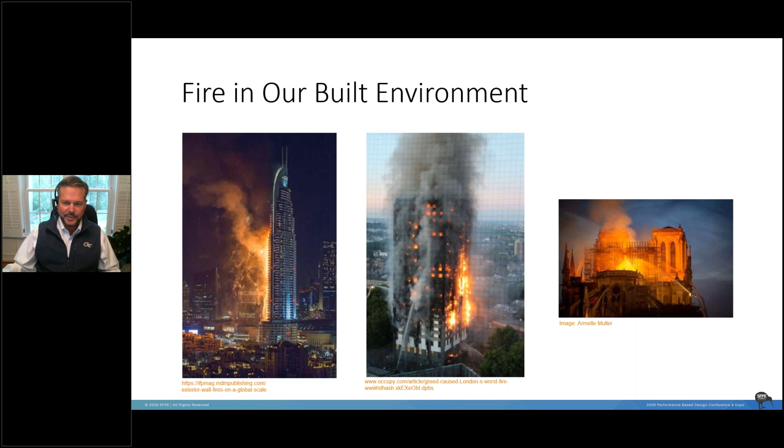So obviously fire in our built environment has been in the news for several years now. In fact, depending on how far back you want to go, several decades. The fires in the UAE probably garnered the most attention, even though we had loss of property there, not necessarily casualties and loss of life on the scale of Grenfell Tower. Grenfell Tower, of course, because of the loss of life, has generated a lot more serious discussion about what we need to do in terms of education, regulatory reform, and how we deliver buildings in our built environment. And of course, Notre Dame, which is a whole different topic, but certainly introduces the idea of landmark buildings and structures and the impact that some of these issues can have on those properties.

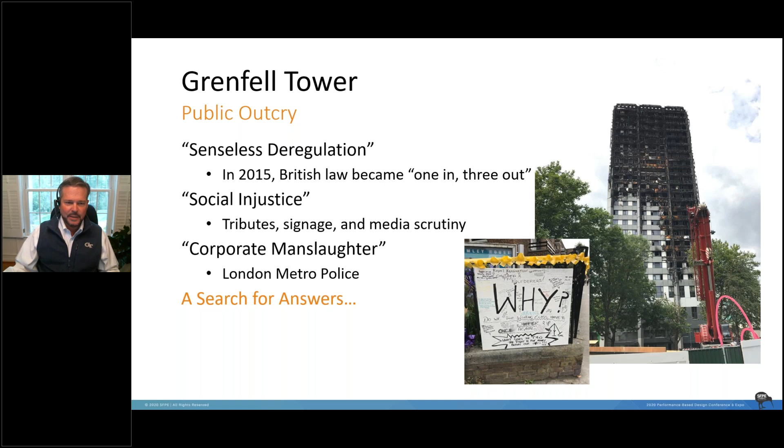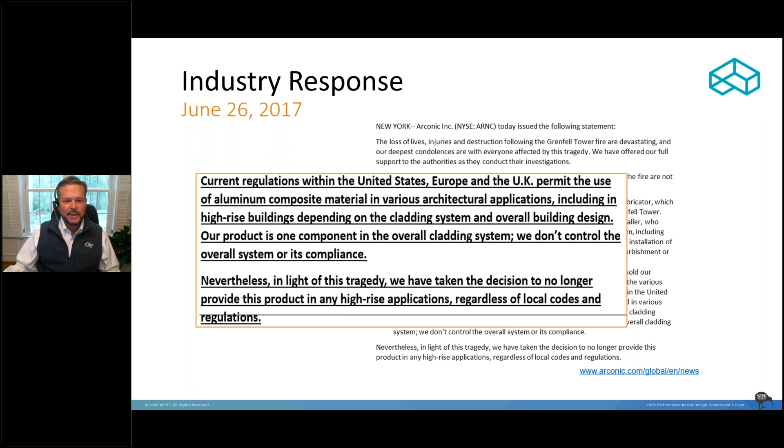The industry response, very quickly, this was the manufacturer of the exterior cladding panels at Grenfell Tower. The response, not surprising, from the manufacturer in terms of pulling product back a little bit, taking a deep breath, trying to understand what happened at Grenfell Tower. And again, how can we make changes to address that? And what can the industry do? A lot of our material science expertise resides in the industry. So there's a keen interest in the industry to help respond to this.

Regulatory response, and Neil will talk in more detail about this. This was some of the initial response. We had an immediate effort by the BRE in the UK to take coupons or small samples of some of the cladding panels and determine the combustibility of those materials. Of course, the focus went quickly to ACM panels with polyethylene cores as fuel for this type of fire. They convened an expert panel.

Everyone took a step back and realized that it's not just the exterior cladding, it's the insulation, it's the design of a rain screen cladding system itself and how it contributes to propagation of fire inside that exterior wall. So you had an immediate response because of the public outcry, a step back with experts to try and understand this in more detail, and then right back out with a variety of different efforts to try and solve the problem.

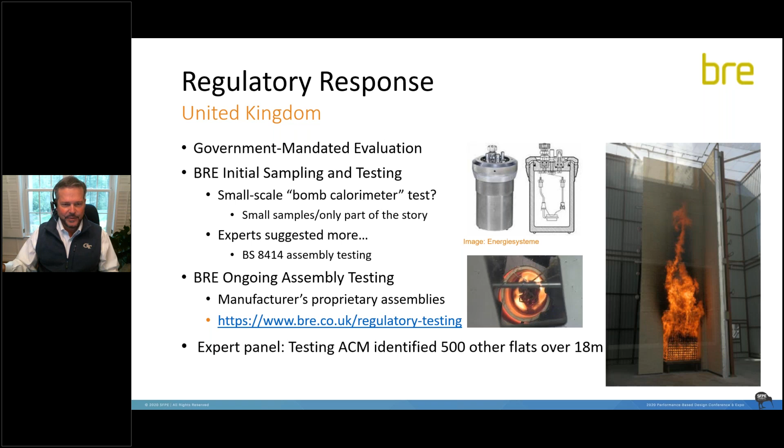We have this website link, and some of you have probably been there already. The BRE undertook to publish different systems and materials that have been tested in full-scale assembly tests to try and educate the population about where this was and what action they were taking in response to Grenfell Tower.

When we look at how buildings actually perform, whether we're talking about heat, air, moisture transfer, microbial growth, or in this instance, fire, combustibility of products and materials and propagation of fire, are we doing enough at the university level to educate? And more importantly, after folks are in practice, what are we doing to make sure that the individuals involved in project delivery have enough knowledge and expertise to really make a difference in this?

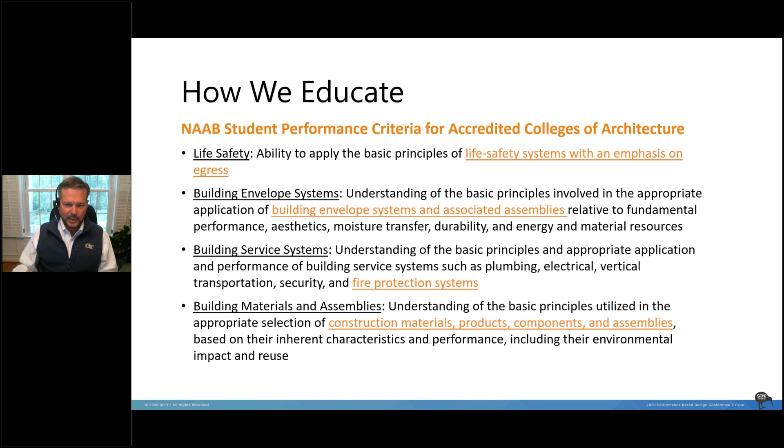These are some of the areas that we're pursuing on parallel tracks with universities to try and help them understand where this curricula should go to help address some of these issues. And again, are we doing enough? When we look at the US and to some degree the UK, at project delivery, design, and construction, we understand that there is a bit of a failure to educate on building physics at the graduate and postgraduate level here in the US.

As I mentioned a moment ago, the topics are there, but the emphasis that different universities place on those topics will vary widely. So what can we do to bring that into alignment and make sure that we're delivering a consistent level of education on these issues? And then first principles in sustainable design, understanding, particularly with material selection, that it's really more than climate specific, renewable resource driven selection of materials. We really have to understand how materials are going to behave in all different circumstances beyond climate.

Compartmentalization of the design profession, this is a bit of the diagram we have here. When you think about property loss, when you think about litigation, the consequences of litigation and property loss, the architect of record is always in the middle of that. We've seen some litigation here in the States where suddenly the sustainability consultant is being held to a higher standard because they've weighed in and made recommendations to the architect of record on insulation products, cladding materials, that type of thing. If they're not fully understood and vetted by the architect, or they're just accepted, you can introduce problems onto

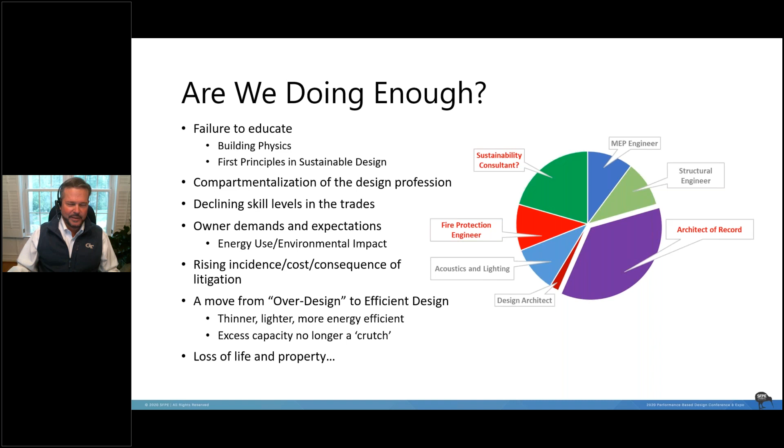When you think about what Neil will talk about here in a couple of minutes on the regulatory side, this is a similar response from the UK. We have what they're referring to as the golden thread. And again, the emphasis here is competence and accountability. How can we make sure that the right people are at the table at the right time in the process to make smart decisions about where the design is headed, where the construction is headed,

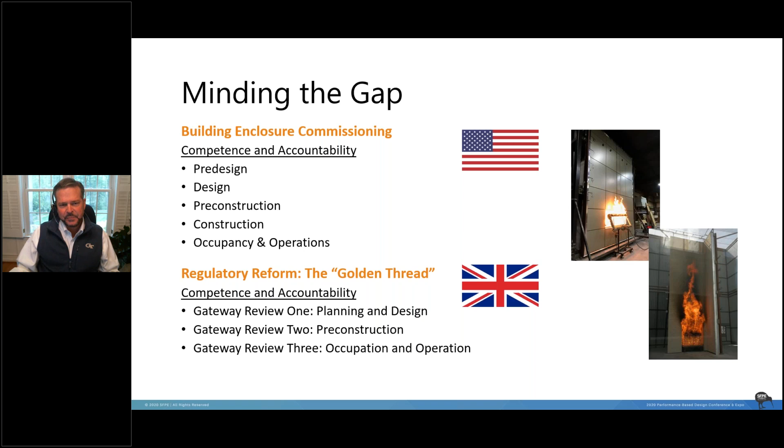and more importantly, from the perspective of the UK and where Neil will focus, when we introduce a layer of government to help understand and address some of these issues, how do we educate that layer? You know, that's the important piece. When we have people responsible for monitoring this process, we need to create on a parallel track a way to educate that group. And that's precisely what this is.

This is the challenge. When we want to create this layer in the context of regulatory reform on a parallel track, we really have to think about education at the university level, training programs, education and training after you're in the practice. We have many, many practicing design professionals, real estate professionals who need some access to this type of education to address some of these issues.

So how do we do that? Do we engage universities? Do we engage standards development organizations? How can we create this framework where people can get the education they need to properly administer this process. And so with that, I will hand it off to Neil, who's going to go into a little bit more detail about regulatory reform in the UK and where we are today.

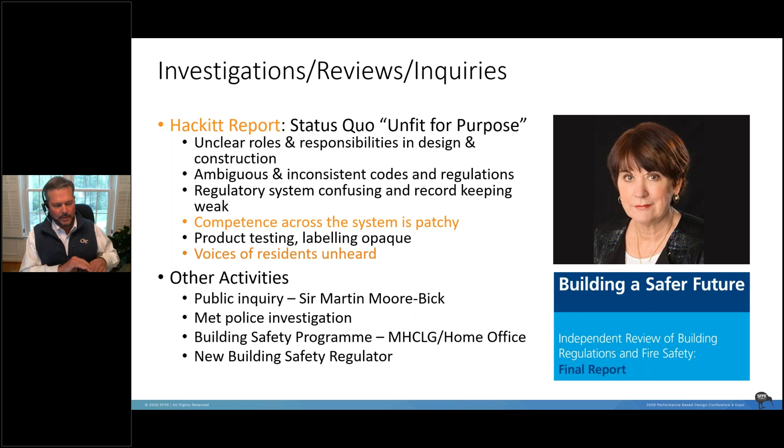Neil? Yeah, thank you, Dan. Lots of interesting questions posed there, and I hopefully got people thinking already. I want to take you on a short journey, setting out some of the background about what we've discovered that's failed in our system since Grenfell, and then focus heavily on the proposals to perhaps put our house in order regarding competence.

But you will be seeing on your screens now a picture of Dame Judith Hackitt, ex-leader of our Health and Safety Executive, brought in by the government to review the whole system, to look at building regulations and fire safety. And we'd sort of got to that opinion ourselves already, that what we had was not fit for purpose.

We were all shocked to the core that we could have tall buildings covered in this material and such a lack of compliance with the building regulations. But Dame Judith dug in and identified some of the underpinning problems: the unclear roles and responsibilities, ambiguous and inconsistent code. She suggested a regulatory system that was confusing, competence across the system is patchy, voice of residents unheard.

The government didn't just bring in Dame Judith to look at the failures in the building regulations side of things. Sir Martin Moore-Bick is running a public inquiry. I'll mention the first stage of that. The Metropolitan Police in London are looking at the potential for charges for manslaughter and the criminal side of things. The government departments, two of them, the Ministry of Housing, Communities and Local Government, alongside the Home Office, who between them have responsibility for fire safety standards and fire law enforcement, set up a building safety programme.

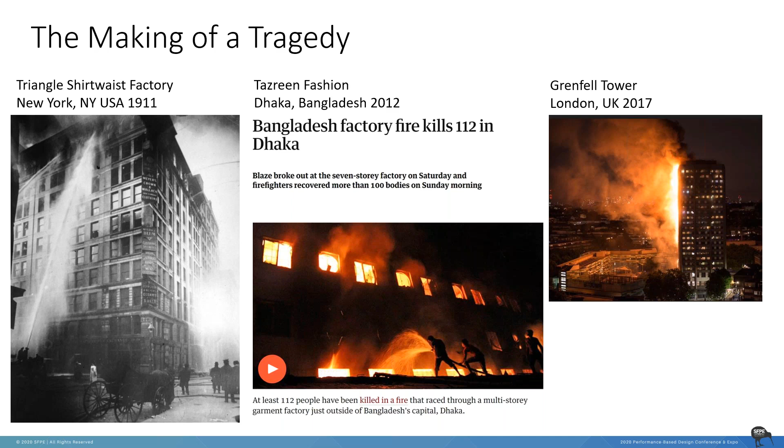Next slide, please. Martin Moore-Bick listened to everyone that was called, over 500 respondents, and came to a conclusion at the end of his first phase of the inquiry that Grenfell Tower's exterior facade did not comply with building regulations. He also had some strong words to say about London Fire Brigade and their stay put advice to the residents on the night, and suggested that things could have turned out differently. But my focus since the fire has been about competence, and how did we end up with this system where no one in the system is required to be competent. Next slide, please.

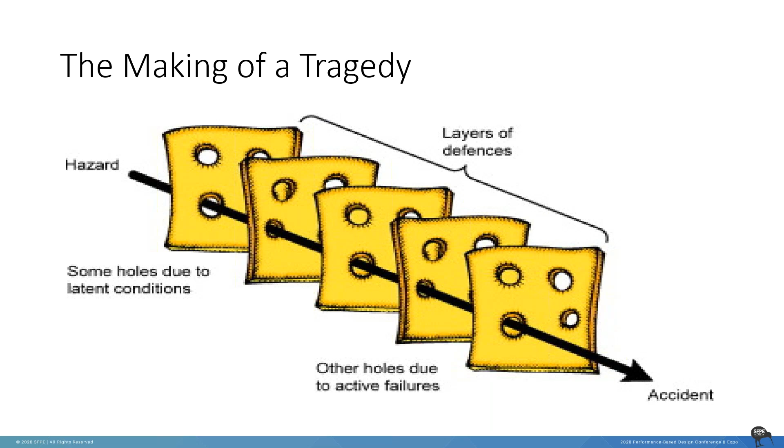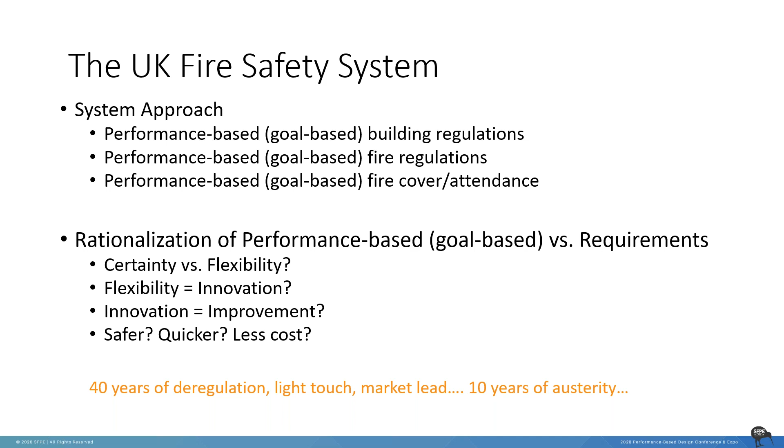So, whilst some of this has been replaced by announcements from the government department, which actually firms up what Dame Judith recommended, I'm going to use 3 slides that capture the essence of what Dame Judith thinks we should be doing. First of all, she suggests we need a new regulatory framework. We've had a historic division between the construction phase, the design, and the occupied, and no one looking over the whole. We did have, for a period, an inspector of fire services, Her Majesty's Inspectorate, that looked at the performance of the system and fed into building regulations.

And back in the day, when people had time and capacity, that was okay. But most of that's been removed, and we're now left with a situation where we know that the system's broken. They're bringing in a new building safety regulator with 3 responsibilities, one of them to be an overarching body looking at the whole system of safety in buildings. A mandatory incident reporting mechanism. So if you're in a building that falls within scope and you're responsible for managing that building, if something goes wrong or one of a number of issues occurs, then you'll be required to report to the regulator. We should know more about failures rather than waiting for them to just add up to a disaster. Rigorous and demanding duty holder roles and responsibilities, I'll come back to that.

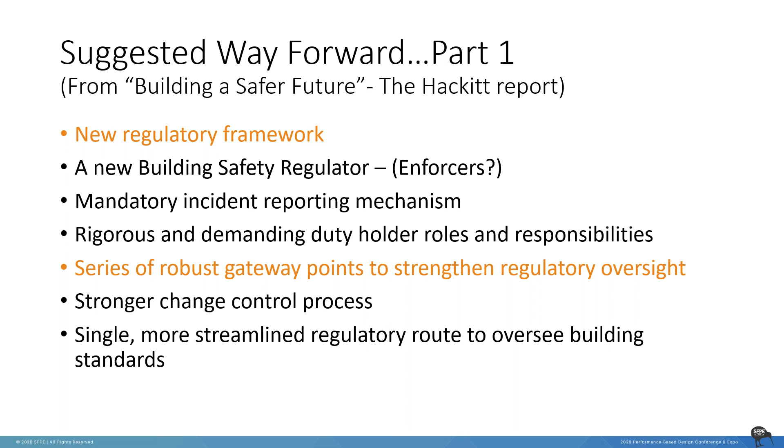The stronger change control process: substitution of materials, deciding to do something differently that's not on the plans, will not be allowed. It will be a matter of reconsulting and rechecking, and a single, more streamlined regulatory route. It will not go from the planning committee to the building regulations body to an approved inspector to the fire service and back again to building control; there will be one body that will oversee the lot. Next slide, please, Nick.

Rigorous enforcement powers. I have to say that we've got enforcement powers for the fire service in terms of enforcement in occupied buildings, but the teeth have been removed from our building regulation system for many years. Powers are there, they have to be used in a very short space of time after the erroneous building work's been completed, and have frankly never been used because we put competition into the building regulations approval market.

We haven't had clear and identifiable duty holders. Is it the builder's responsibility to build a safe building, or the designer to design it safely, or the person putting the money into the project? We've had some success in the construction design and management regulations, identifying principal duty holders.

Hackitt suggested extending that, and the government has fleshed that out into us recognising a principal designer, a principal contractor, and a building safety manager, and they'll carry the can through the lifetime of a building from concept to demolition, and it will be recognisable which body could be sued if they're not discharging their duties responsibly.

Which brings in the clearer rights and obligations for residents. People have been living in buildings and oblivious to safety. In fact, quite well, they should have been able to, because if everyone had been complying, we'd have had very safe buildings. But since Grenfell, there's been obviously a backlash and a great deal of concern that residents have not been involved, have not recognised that changes to buildings have actually put them in jeopardy, and that is going to change.

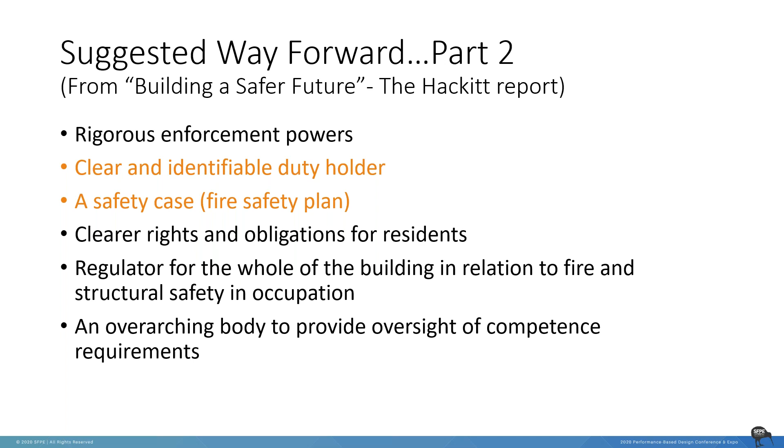The regulator for the whole building I've mentioned, and one of the key nuggets for me, an overarching body to provide oversight of competence. I think the next slide goes into competence in a little more depth, so I'll save that comment. Going back to Hackitt's list, the ownership of technical guidance needs to sit with industry, but there should be an organisation that overlooks that prescribed by government. And we have the Building Regulations Advisory Committee, but they should be informed by the industry's best brains about what works.

Regulations have been complex. I have some difficulty with this concept. I've yet to find the dummy's book for brain surgery, and frankly, building is complicated. Managing buildings to make them safe from fire is complicated, and our guides, our British standards, our building regulations approved documents are not meant to be read by the man or woman in the street. They're meant to be read by competent professionals, and maybe the blame lies with the fact that we haven't required competence.

There's concern about the products that we use in construction and whether they're clearly labelled and whether we can trace where they've come from. And back in the day when we were building everything out of bricks, blocks, plaster, cement, and inert substances, it wasn't such a problem. But today, with CLT, mass timber, and the range of plastics that have to be used to achieve the insulation elements, then life has sure got far more complicated.

It shouldn't be beyond the wit of man in today's world for us to have a digital record of the design concept, who did what in the building, in the construction phase, and give some transparency for the responsibility and actually the design knowledge that needs to be transferred forward to both the construction and to the occupied phase.

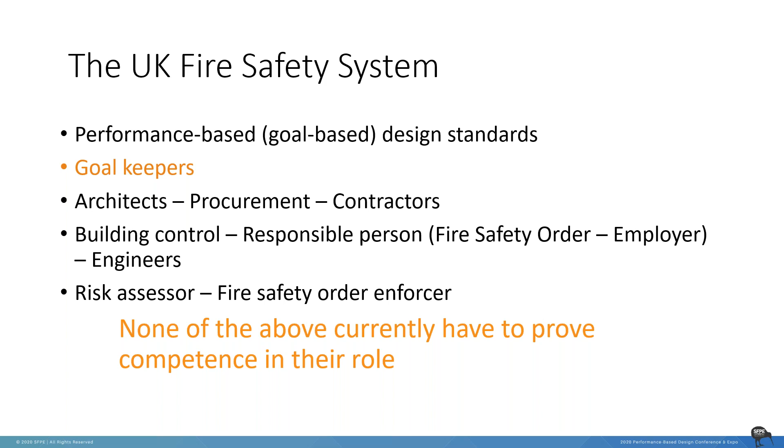I think I mentioned this before. Hackitt said that competence across our system is patchy, lack of formal process for assuring skills at every stage of the life of high-rise residential buildings, and we're behind other parts of the world. Prefer not to focus on that, but that's what she found.

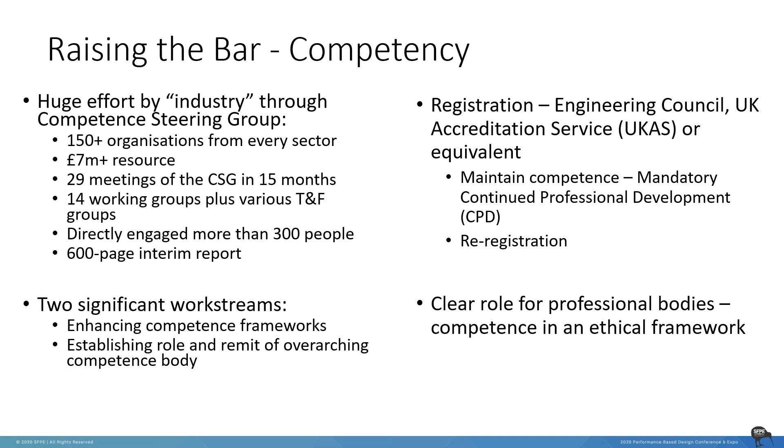Next slide, please, Nick.

So my energy for the last 2 years, the primary role has been to help the group looking at fire engineers. Now, in 1918, the only fire engineers in England were firefighters. Chief fire officers got together and created a little organisation called the Institution of Fire Engineers, but they were the only people, apart from some people designing sprinkler systems for commercial risks. Fire engineering was left to the fire service.

But in the last 30 years, we've seen fire engineering, fire protection engineering, fire safety engineering develop as a standalone profession, and people studying directly into degrees and being employed specifically as fire engineers. To help organise where this fits into the jigsaw of safety of a building, what we needed to work on in the fire engineers working group was what is expected of a fire engineer. How do you identify a competent fire engineer?

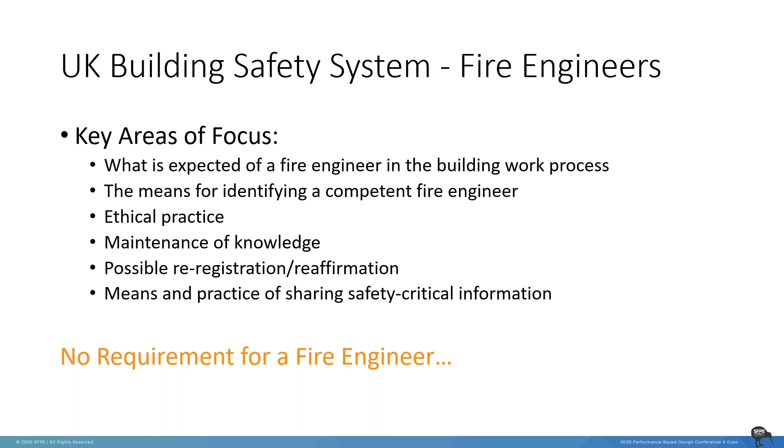We're certainly interested in them operating ethically. We need them to maintain their knowledge. We need a system of re-registration and a means of sharing safety critical information. Some call that whistleblowing, but we have other systems. But today we have no requirement for that, but the working group has worked through proposals.

Next slide, please, Nick.

We haven't gone alone on this. One of the other threads that Dame Judith identified was that we needed all engineers working in the built environment to raise their bar as well. And because in the UK, we work under license from the Engineering Council, that's our overarching body that sets the standards for registration at engineering technician, incorporated engineer and chartered engineer level.

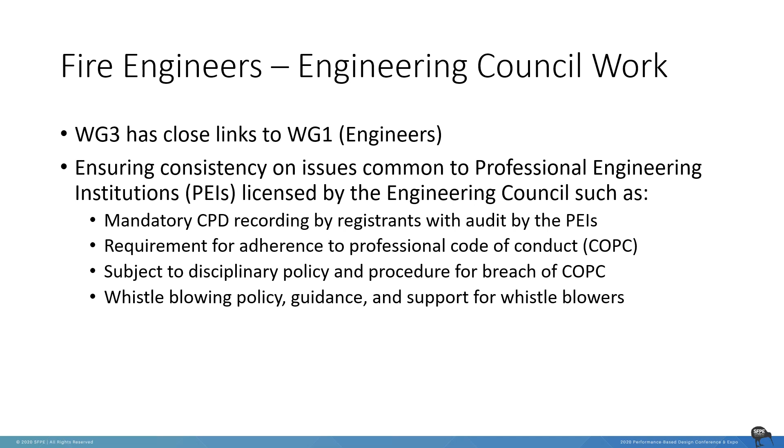And working with them, we're trying to build up towards implementing a process where there is mandatory CPD that's equivalent and valued across all of the engineering professions, that we all adhere to a code of professional conduct, and that we all have access to whistleblowing, guidance and support for whistleblowers, and protection for people to ensure that we can learn from each other. Thanks, Nick.

The proposal is that the new duty holders, the principal designer, principal contractor and building safety manager, should only appoint professionally competent fire engineers to carry out safety critical work on in-scope buildings. The scope that we're talking about hasn't changed. We're talking about residential buildings over 18 metres tall or over 6 floors. But the intent and expectation is that once we have a register in place, all the professionals will work to that standard, and we wouldn't expect other people to be operating. It should become de facto standard.

And I heard Dan mention that he's a member of the Royal Institute of British Architects. They craft the standard platform that is used for managing the plan of works through construction, known as the RIBA plan of works. They were introducing a fire cut to that, an overlay that looked at fire, and we were encouraging them to recognise that the fire engineer should be brought in not only at the design phase, but actually needed to be maintained through all the relevant stages to enable competent sign-off, so that what the fire engineer built into the strategy has actually been delivered.

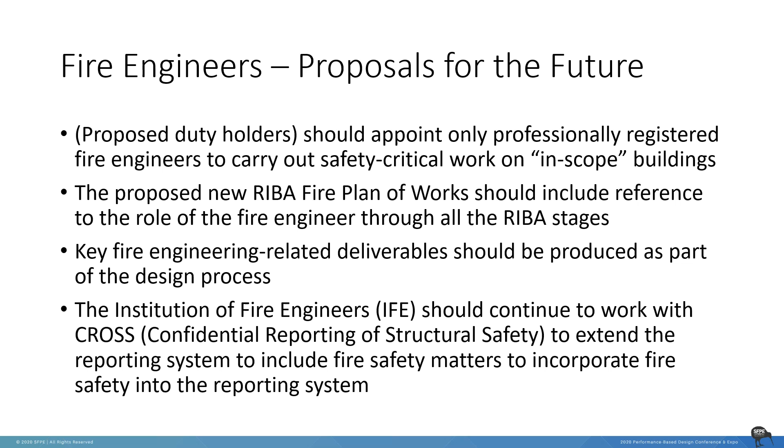I better speed up a bit, Nick, haven't I? I'm looking at the time. Next slide, please.

To manage the competence that I talked about, we're looking at an independent competency body that will bring together all of the various threads and ensure that the frameworks that are designed by each of the different professions actually deliver what is needed, and particularly from my perspective, make sure that the fire knowledge is appropriately profiled within each of those roles. Next slide.

In a nutshell then, the Building a Safer Future proposals introduce a new layer of transparency, a golden thread of information with duty holder accountability running through the three gateways. There'll be accountability with a new national building safety regulator, and enforcement with civil sanctions against those companies, and potentially criminal liability against individuals who fail to abide by the standards necessary. Next slide.

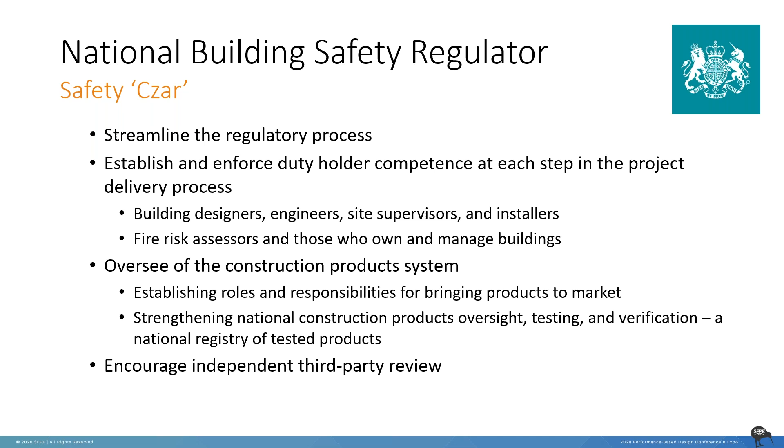That's really my messages in a nutshell, that fire safety is in our hands. For the first time in my career, we are very much focused on fire safety. We've been accepting and understanding that the previous generations have made a good job of fire prevention, but our world has been shaken by a disaster. And from that, it's really important that we continue to share learning. I would emphasize that we need to standardize our language and data, and very much embed fire safety lifelong learning.

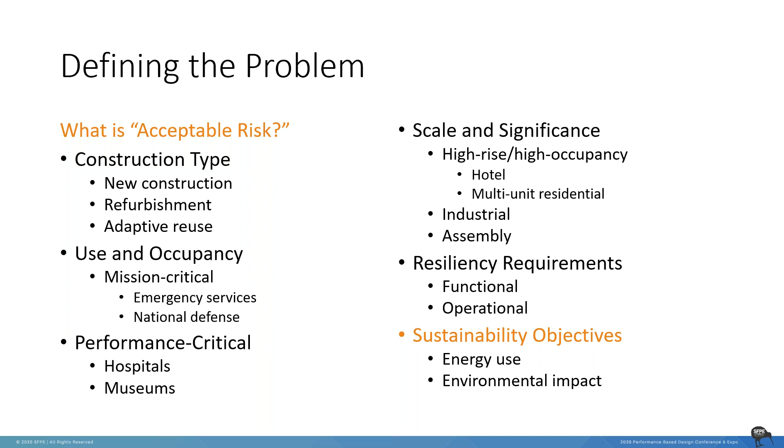Along the lines of managing the risks themselves, as we've heard from Neil about accountability throughout the process of the building life cycle, managing that risk includes looking at not only the design and specification writing, but also potentially the submittal review process and actual construction, and then the life cycle once that building is in use.

Oftentimes this includes evaluating the materials themselves, especially if there is a value engineering aspect to the job, or a proposal to switch out an individual material, to look at how that may affect the overall fire protection and life safety objectives of that building, especially when performance-based design is evaluated. A holistic renewed approach should be reviewed if material substitution is proposed.

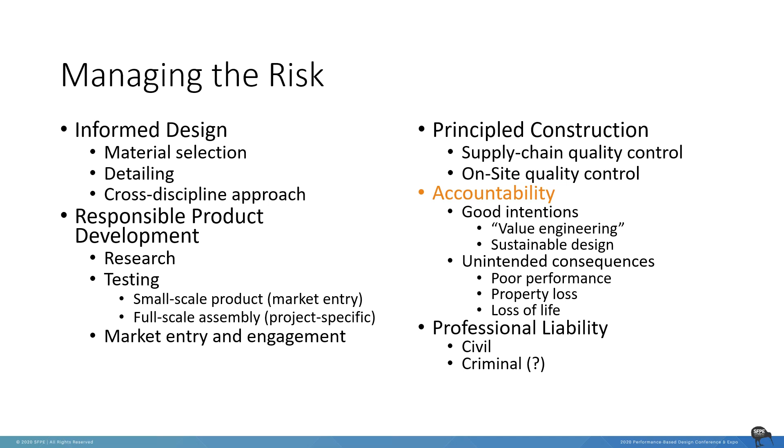So, really quickly, some example organizations and an introduction to international fire safety standards, from the work being undergone in the world. Launched 9 July 2018 in a meeting of the UN Economic Commission for Europe, the International Fire Safety Standards group was proposed. This group is supported by SFPE as well, and it's essentially to create common principles that can be used globally to increase fire safety concepts and awareness throughout the world, to hopefully adopt a holistic approach and a framework both for new and existing buildings.

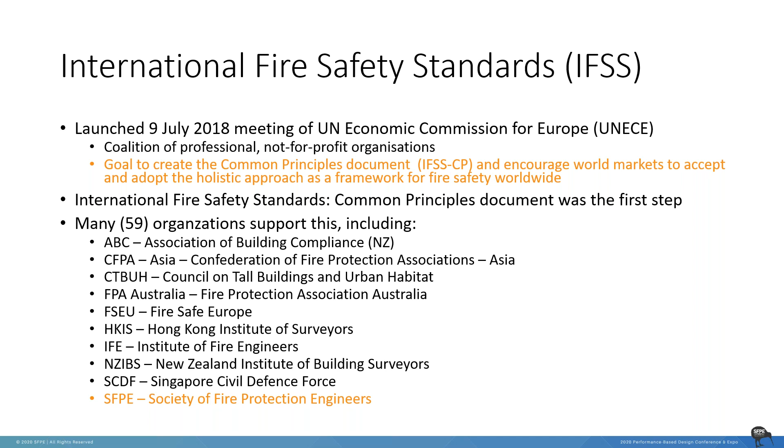Excuse me. Along those lines, part of the work that group is proposing to use is common principles. These common principles are prevention, detection and communication, occupant protection, containment, and extinguishment systems. The life cycle of the building is through the design, construction, and use throughout.

And then in particular, some concerns that Neil's brought up with buildings in the UK are adaptive reuse and repurposing of historic buildings, and potentially reclad or overclad of existing buildings to increase the energy performance.

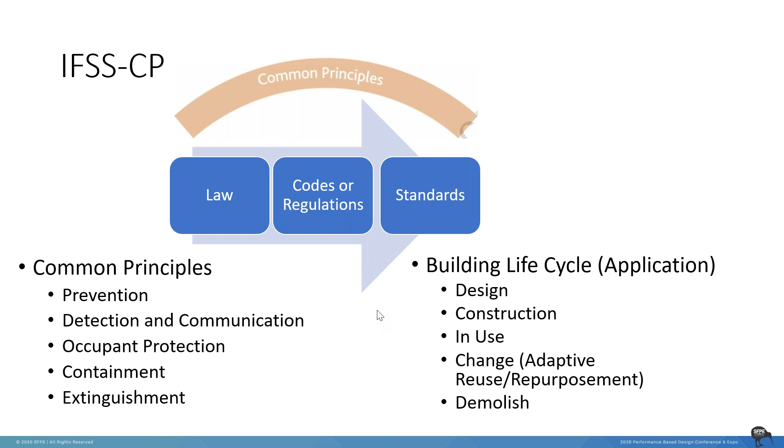Along those lines, as we've heard from Neil as well, is accountability throughout the process of the individuals in charge, whether that be comprehensive competency, quality assurance throughout the life cycle of the building, reviews of those processes, and then who is that responsible person or persons throughout that process.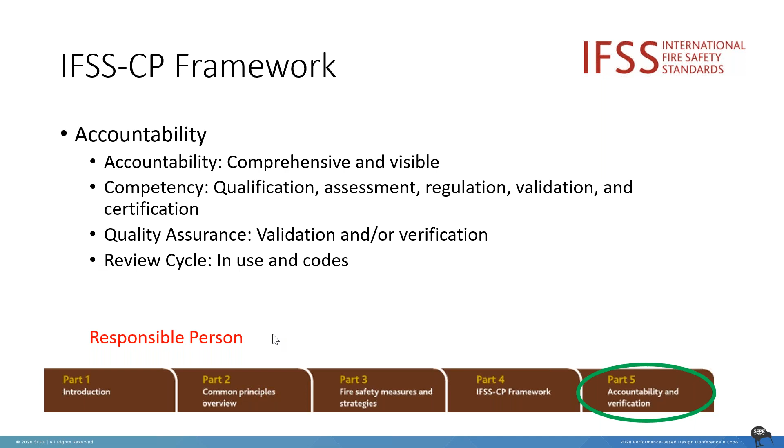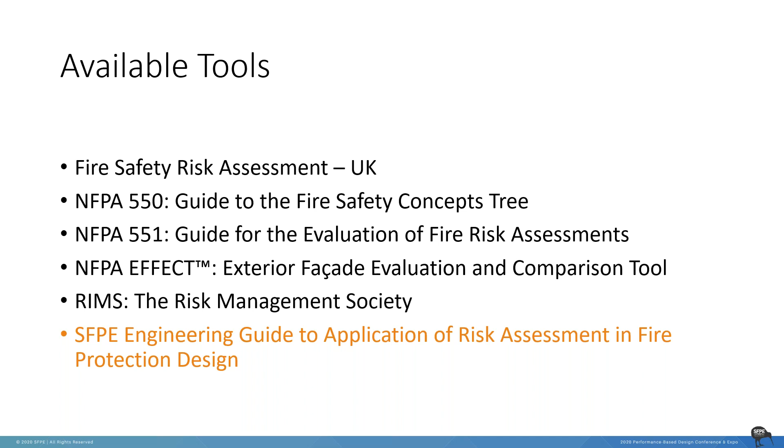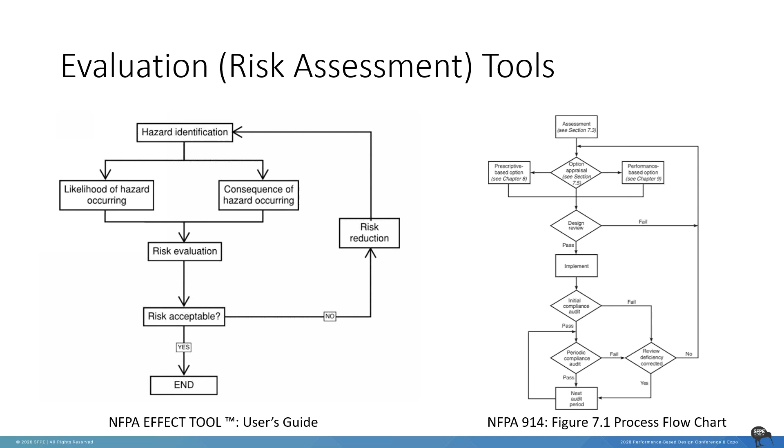Some examples of available tools for the fire protection engineer include fire safety risk assessment within the UK, several NFPA documents, and the SFPE engineering guide for risk assessment in fire protection design. Some of these tools, including NFPA's EFFECT tool, specific to building enclosures and review of potentially combustible facades on existing buildings, include a risk evaluation and an understanding of whether that risk is acceptable. This often includes interaction with the client to understand their risks and what they deem acceptable or not, and then an iterative process with the building enclosure expertise.

Within the NFPA EFFECT tool, there's effectively 3 tiers broken up into 2 parts. Part A is essentially review of the building enclosure itself. And then part B is more the review of the fire protection and life safety systems within the building. Oftentimes, if a building, especially an existing building, is deemed to need further review, one would move on to tier 3, where tier 3 is an integration of the building enclosure with the fire protection systems in that building itself.

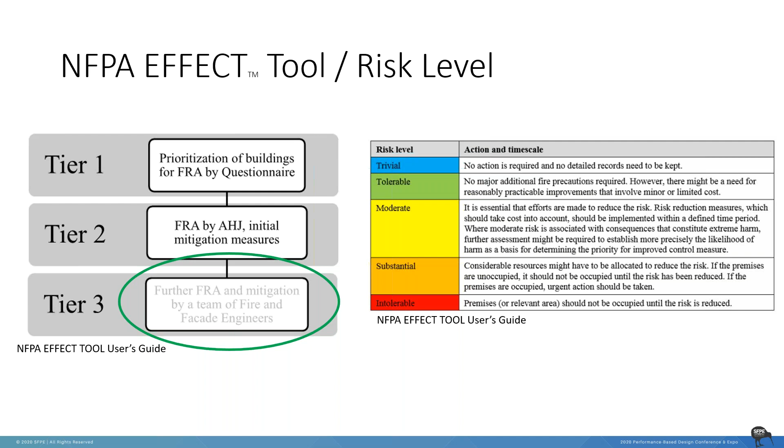For fire protection engineers, NFPA's 550 fire safety concepts tree can be of benefit to show the integration, overlap and layout of a fire protection strategy for a building, whether that be an existing building or a new building. First off, we'll start with the prevent fire side of the fire safety concepts tree, where manufacturers, building enclosure experts, and fire safety engineers can evaluate how the fuel can be controlled.

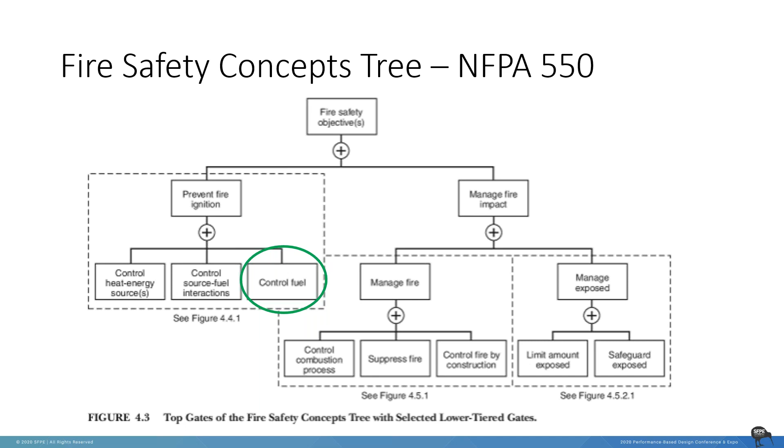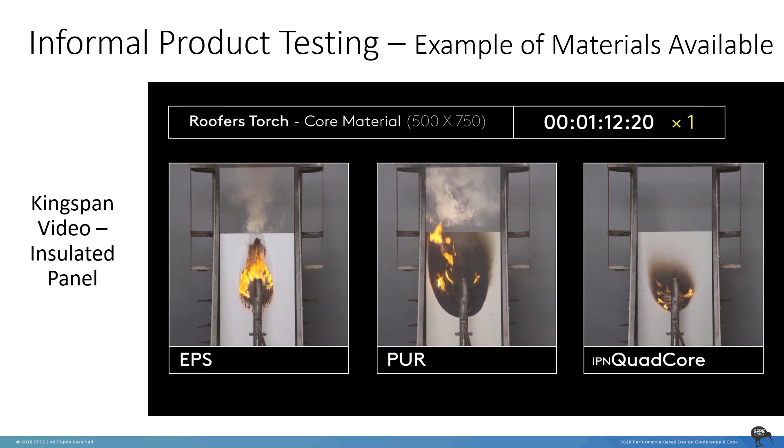Here's a brief example of different materials subjected to a material test. For example purposes, this is courtesy of Kingspan. You can see how different insulation materials may burn and behave differently when subjected to fire. Along those lines, there's also formal product testing that a manufacturer may undergo when evaluating the system itself, whether it be an individual product or assembly test.

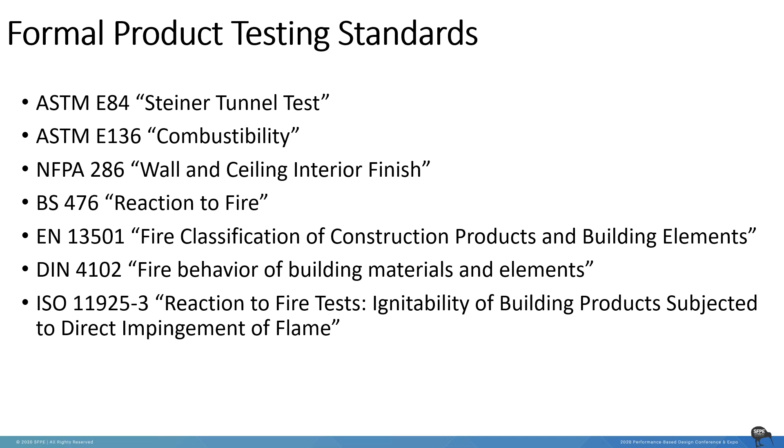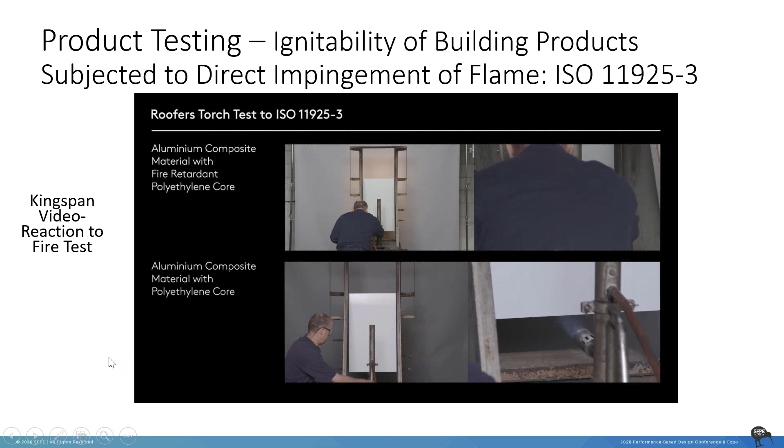Focusing on an individual product test that a manufacturer may be able to conduct on their own, this is another example of two different composite material panels being subjected to a flame, courtesy of Kingspan. From a facade fire risk standpoint, the panels look very similar, but the core material is significantly different. As you can see in the image on the bottom, it's a polyethylene core, and flaming droplets of the core material start dropping down.

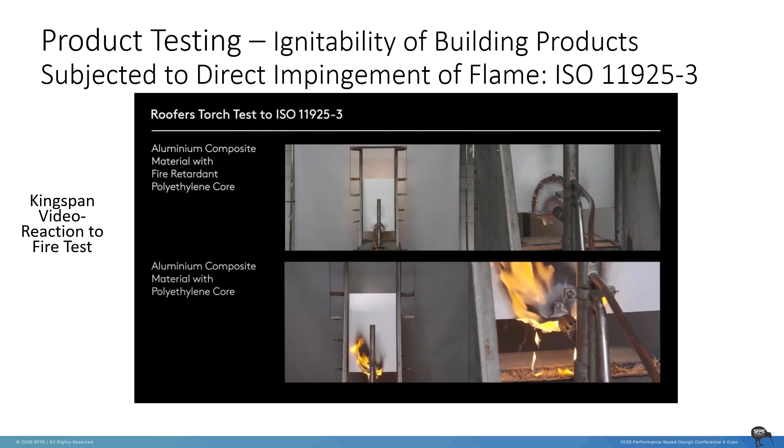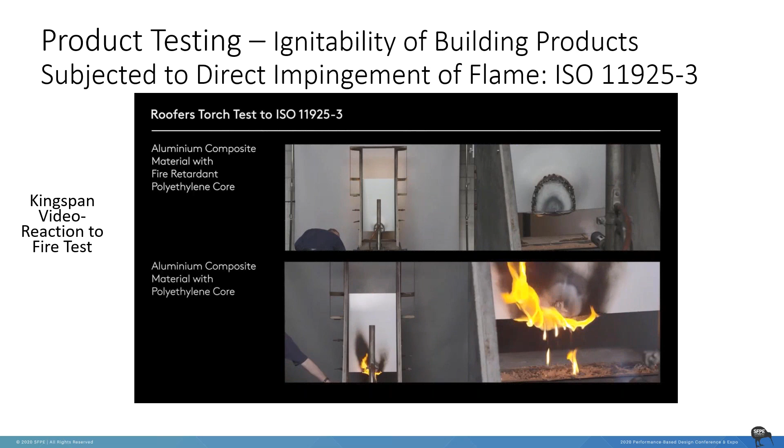This can be of specific challenge to fire safety engineers, building enclosure consultants, and then, in the event of a tragedy, firefighters themselves, as fire may spread downward via the flaming droplets.

Along the lines, getting back into the NFPA 550 fire safety concept tree, if one is reviewing different materials that may be somewhat combustible or combustible in their building enclosure, it's important that we can no longer, as fire safety engineers, look at saying that a fire will not start, but we look at what would happen if a fire starts and trying to manage that fire, whether that be through control of the combustion process, suppressing the fire, or control of the fire by construction.

Focusing on controlling the fuel again and how that fire may spread or the combustion process, there are many assembly tests. For a global comparison of those different tests, there's 4 presented on this screen. Most of them use visual observation and thermocouples to identify if a test is passed or failed, and have different fire sizes that are used to evaluate the different facade materials and assemblies. And then somewhat unique with the FM test, for example, is that test is also done under a cone calorimeter and can provide heat release rate information.

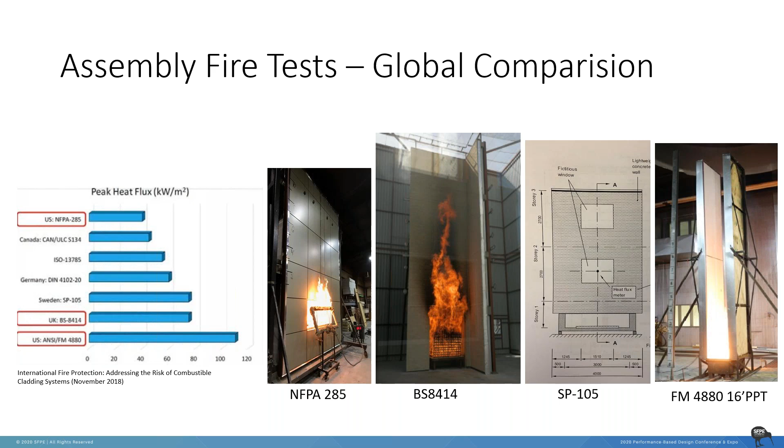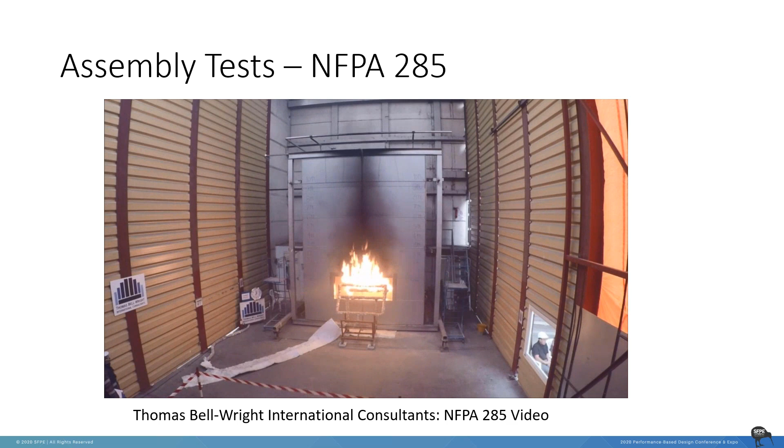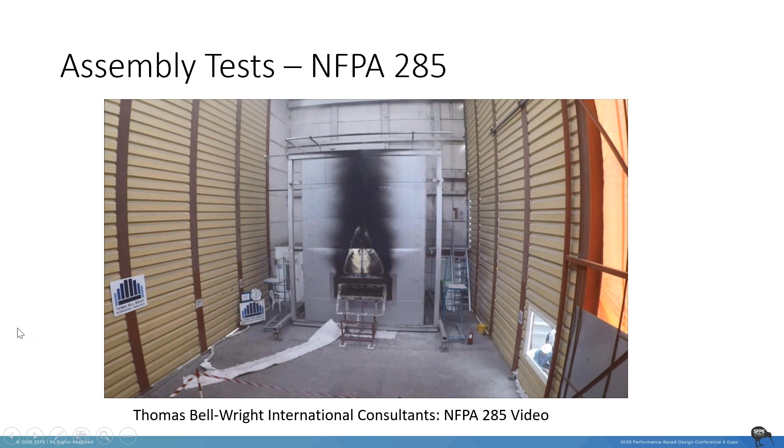Courtesy of Thomas Bell-Wright is an example of an NFPA 285 fire test. Along these lines, again, it's additional paneling, examples of how this test can be conducted and what the observations are if one has not seen one of these tests. The firefighter just now has activated the burner at the front to further simulate flame leaving a fire compartment that would have occurred in an uncontrolled compartment fire. Again, a passed NFPA 285 facade assembly.

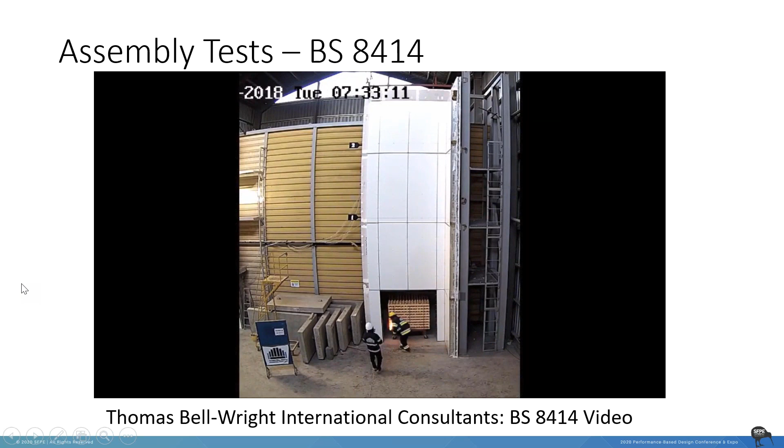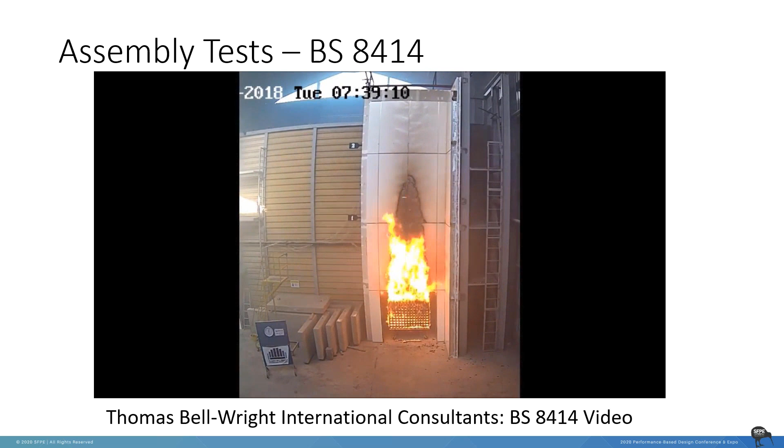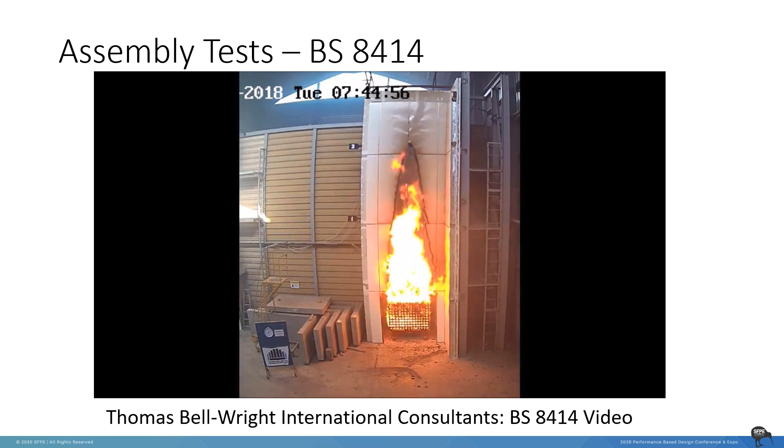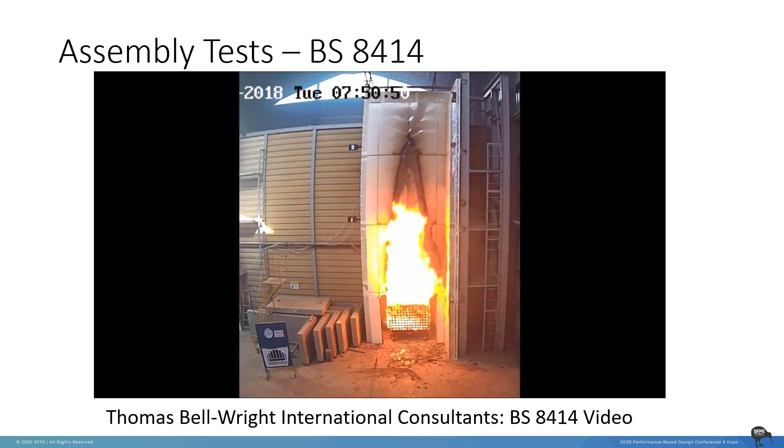Along the lines, also courtesy of Thomas Bell-Wright, is a BS 8414 fire test. This test is slightly larger in height and has a return wing wall, which will change the radiation effects onto the facade itself. And again, these are done visually and through thermocouple observation, whether the test is passed or failed. In this case, this is an example of a facade assembly that has also passed the BS 8414 and BR 135 criteria itself.

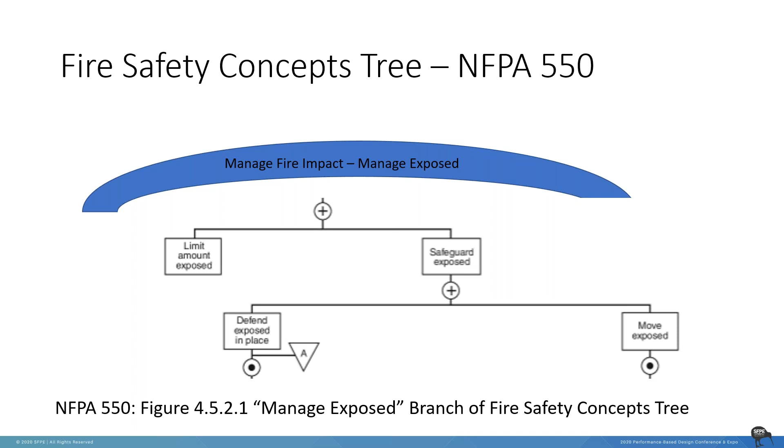Furthermore, within the NFPA 550 tree, managing the fire impact, managing the exposed can also be an option. This is viewed more within existing buildings, if you're dealing with some unique historic structures, for example, it could be limiting the amount of the exposed, perhaps offering guided tours, and then safeguarding the exposed on the other branch, whether that be defend in place or move the exposed out of the building, for example. Oftentimes when doing a holistic evaluation of an existing building that may have combustible facade elements, part of managing the exposed is reviewed and looked at to see if improvements can be made.

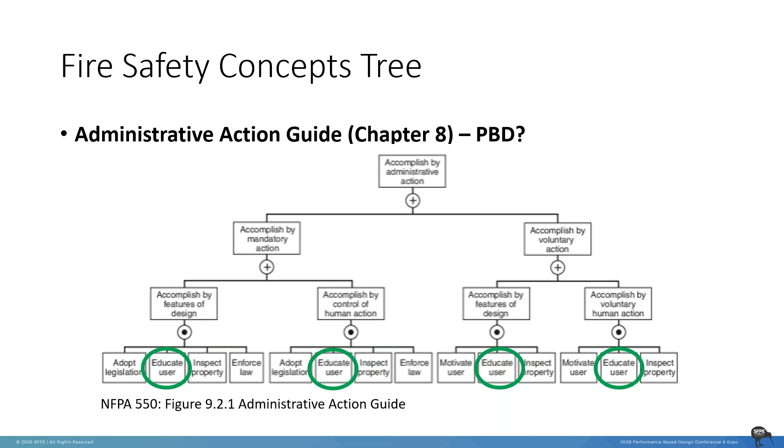And lastly, to tie in with many of the aspects that both Dan and Neil presented, throughout this process, whether it be an administrative action for how that building may be managed, or how working with different jurisdictions, the clients involved, educating the user is imperative, and education and competency throughout the process, as both Dan and Neil discussed, is important and should be looked at further.

Along those lines, to tie in with what Neil talked about, sharing and learning, standardized language, the fire safety is in our hands, and oftentimes SFPE offers many useful guides and helps fire safety engineers around the world reach higher, and through the IFSS that SFPE is a member of, maybe one day we'll have more globalized standards and common terms for conducting holistic fire reviews and fire safety of existing buildings and new buildings as well.